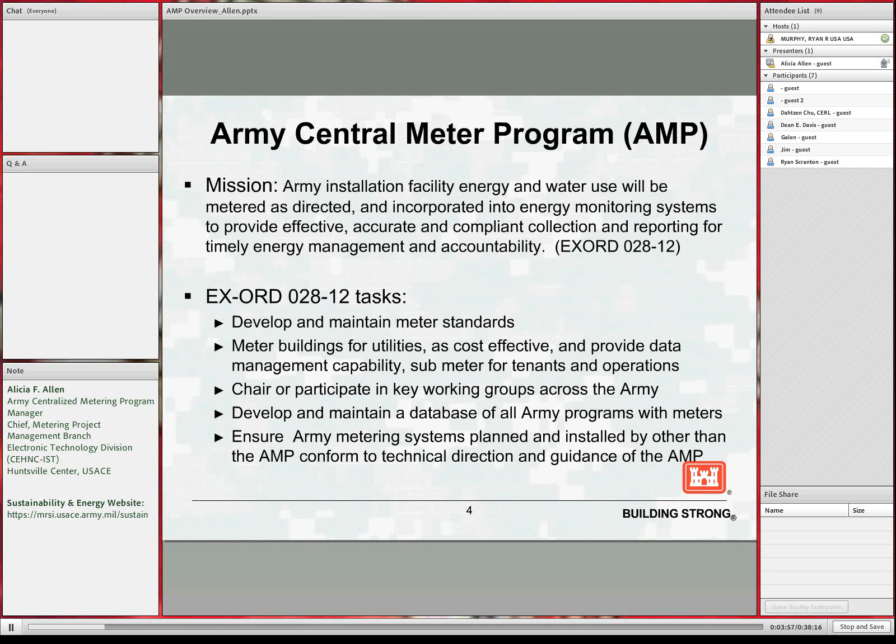The first task is to develop and maintain meter standards. The meter standard, if you haven't looked at it lately, was updated on 8 June. It's stored on the UMCS MCX website, which is connected to the Huntsville Center homepage.

We have it ready to go on AKO when AKO comes back up, and it's also on the Sustainability and Energy metering webpage, which some of you may have seen. We have an ECB in development that will also issue that guidance.

The task to meter the buildings for utilities as cost effective and provide data management capability has criteria: 29,000 square feet is a Tier 1 facility, which is Army criteria. A secondary criteria, which is really the primary criteria, is $35,000 a year in energy cost, which is DoD criteria.

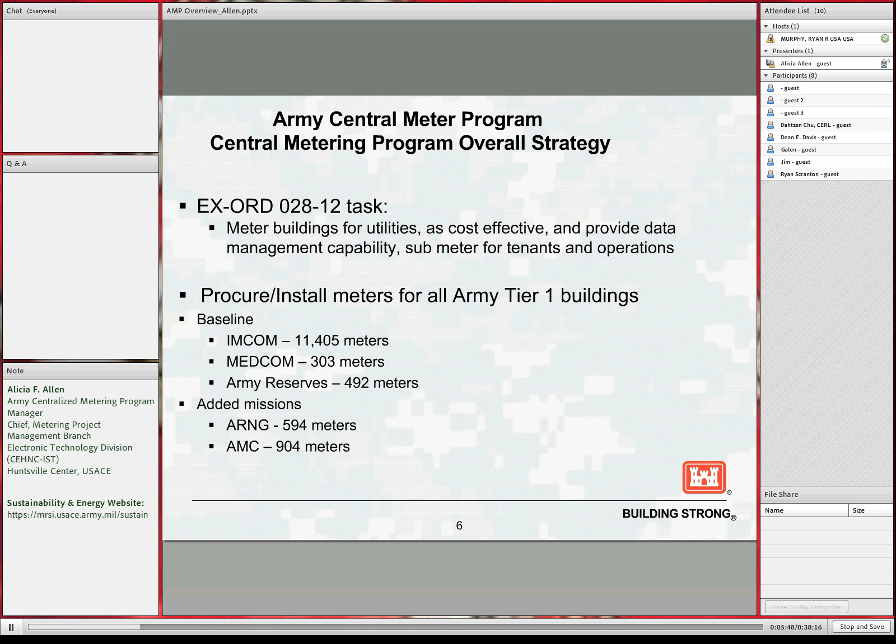The baseline for Tier 1 facilities was 12,200 electric meters, divided as shown here. The added missions for the National Guard and for AMC brought that up, as well as changed site conditions on the original locations. Now we're at about 14,500 electrical meters that will be installed for Tier 1 facilities when finished at the end of this fiscal year.

The meter system includes multiple utility meters: a gas meter, a gas pulse kit that fits on an existing meter, a water pulse kit that fits on an existing water meter, and/or an electric meter, in any combination. All of these meters feed into a building point of connection, or building level controller, sometimes called a building automation controller. These terms are interchangeable, and they represent the device that collects meter data from multiple meters.

The device feeds the data forward to the front-end server, where it's displayed, then forwarded on to an Army enterprise reporting system.

The building point of connection is an IA, an information assurance device. It has information assurance functionality, as does the advanced electrical meters we use. Because of that, they have to be tested for IA security, as well as the configuration of the front-end server. This is why we have to have an accredited system, to make sure all of these are safe from an information assurance standpoint, to report forward to the Army backbone, where the MDMS, the Meter Data Management System, resides.

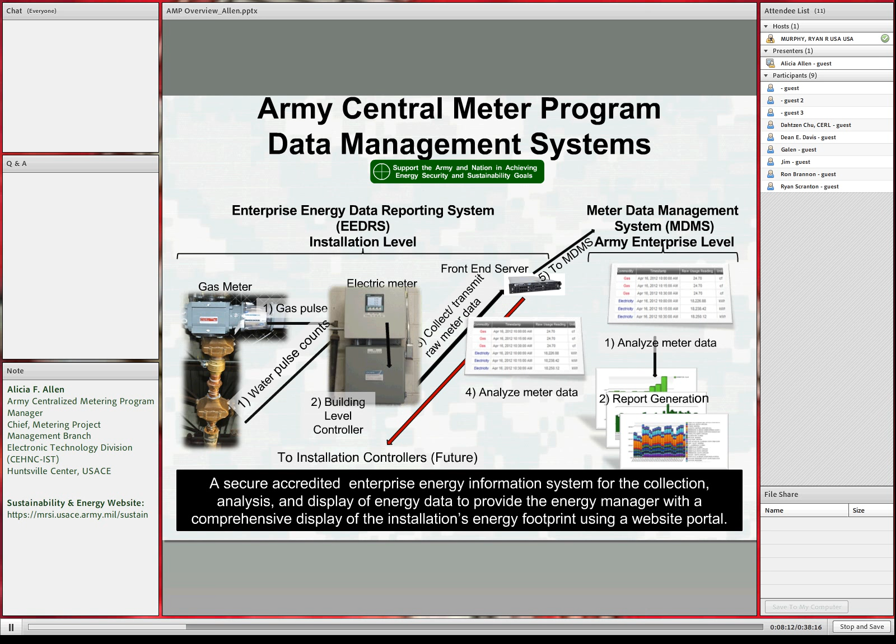Depending on the server system installed at the installation, there will be some level of reporting. There's always some level, but the actual number and type of reports available may vary. There are standard reports available from the MDMS location. I don't have the full briefing for the MDMS as part of this presentation, but if you have any questions about it, we can definitely answer those.

The architecture of the metering system is shown here. The metering system's acronym is EEDRS, which stands for Enterprise Energy Data Reporting System, not to be confused with the enterprise level meter data management system. We're kind of going away from the use of that terminology at times.

Basically, your architecture includes any of your metering devices, a building point of connection, various switches that send the information back along the net backbone at an installation to a head-end server. We do have a few situations where wireless along the net backbone is approved. Right now, the Army meter system is on an isolated VLAN for the metering system, I think it's VLAN 124. Even though the NEC is responsible, it's actually an isolated system, not tied directly into the installation's network.

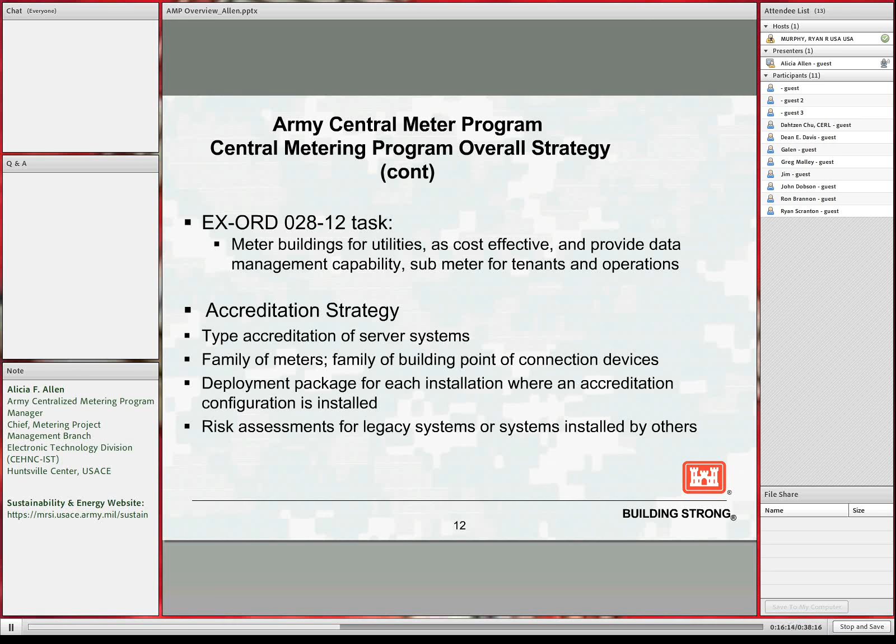As I said, we have 6 systems. The goal is to have all the systems be open systems, which means they can talk to anything, and they're very easy to work with and make changes to. Right now, only 2 of those are open systems. Our plan is to get the ATOs on the systems as they are approved, but eventually seek accreditation of non-proprietary variations for the other 4.

The organization performing the information assurance testing for us, and that has prepared the common documentation, is ISEC.

We have weekly phone calls with ISEC, NetCom, ACSIM, and supporting organizations at the programmatic level to make sure we are moving as quickly as possible on processing the IATOs, the cons, and any other issues, and that when the ATO documentation is submitted, that also moves as quickly as possible.

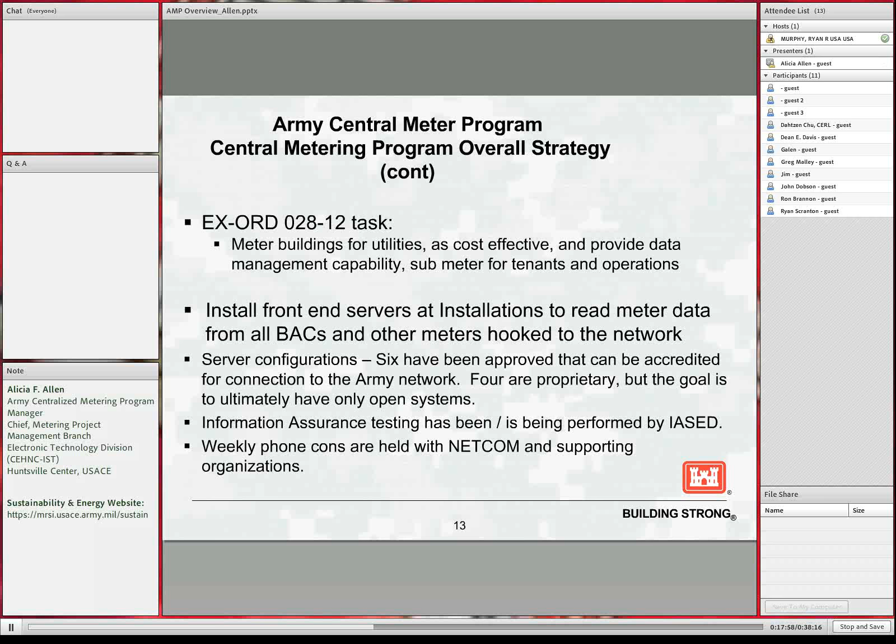We'll also be reinitiating our weekly fielding calls that some of you may have participated in when we were getting ready to install some of our INET servers. Those were suspended for a few weeks because of a complication with the cons, but we're now ready to go back on board with those.

The schedule for the connectivity, here I've shown the IATO. We have IATOs, interim authorities to operate, for 4 systems. The 5th system is at IACORA to start the process for the IATO. The 6th system, we've had difficulty getting the correct documentation from the contractor, and at this point we're likely to just go for an ATO.

The ATO accreditation process takes about 7 weeks at the ISEC level for the certifier to review all the documentation, verify the system does what it's supposed to do, and define what the risks are. That accreditation process will start the week of December 2nd for configuration number 1, and every 7 weeks after that we'll start the accreditation process for the ATOs of the other systems.

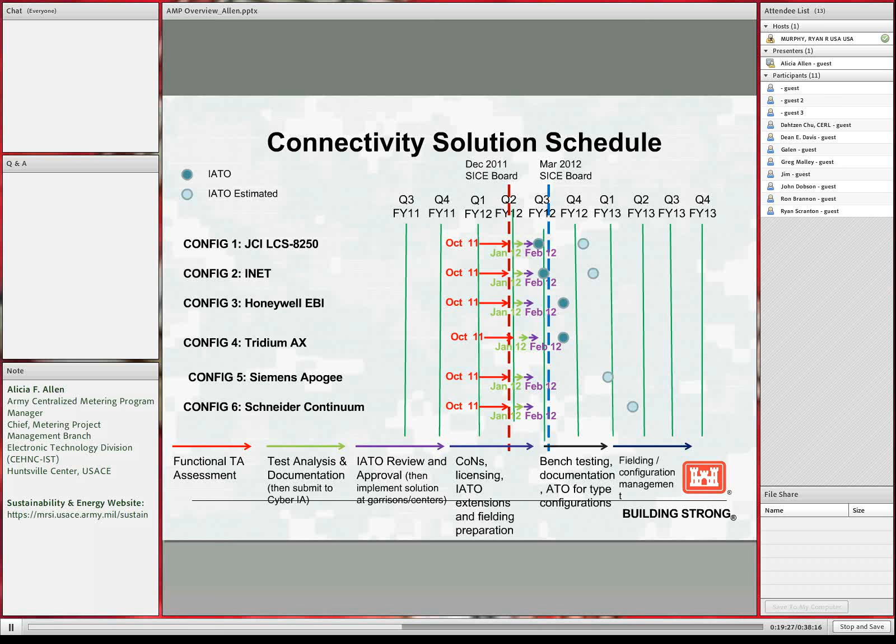As I mentioned earlier, the ultimate goal from an Army standpoint for reporting is to have the information available at an enterprise level system. That system has multiple methods of displaying and storing data, for historical use as well as for current situations.

The MDMS system is managed by John Trudell. Some of you may be familiar with him, as he, early in the process, helped support our IA process for the metering.

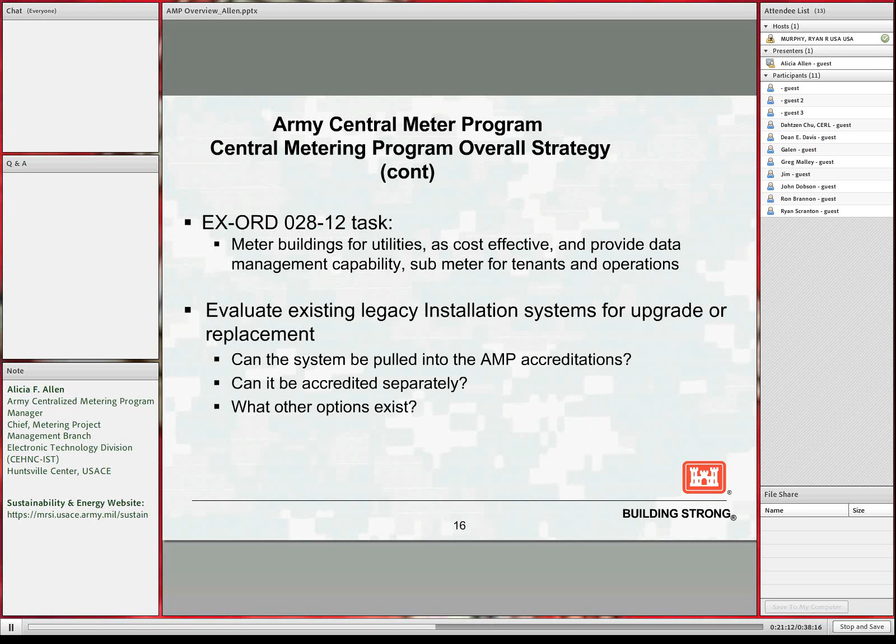I've already talked about evaluating the legacy systems for upgrade or replacement and some of the questions that will be faced. By the way, on these legacy systems, we'll have at least 2 courses of action to replace components or even servers: one could be to get in the queue for Army funding for most systems, or it might be to go ahead and make those changes with customer funding from the installation or from a tenant in some cases, which might allow them to talk to MDMS faster.

We expect to be finished with the Tier 1 electrical metering by the end of FY13. We are starting up the Tier 2 buildings this FY, and those are the lower priority buildings, the smaller buildings, the less energy-use buildings. There is criteria developed for how we select those facilities, and it is in the implementation plan for the Army meter program.

That criteria is under review by ACSIM, and it may be modified before we end up with a final list of what will be a Tier 2 building. In addition to the lower priority buildings, the Tier 2 process will include a lot of submetering for tenants, such as data centers and simulators, and we may also go back and look at facilities that were not heavy users when we started the program but have since grown larger. So we'll go back and look at the original list of buildings as well.

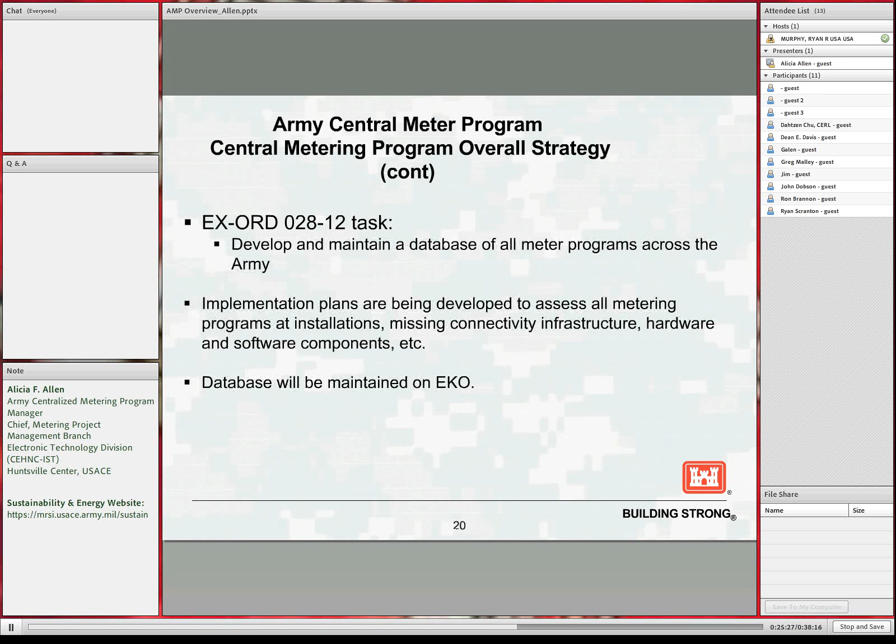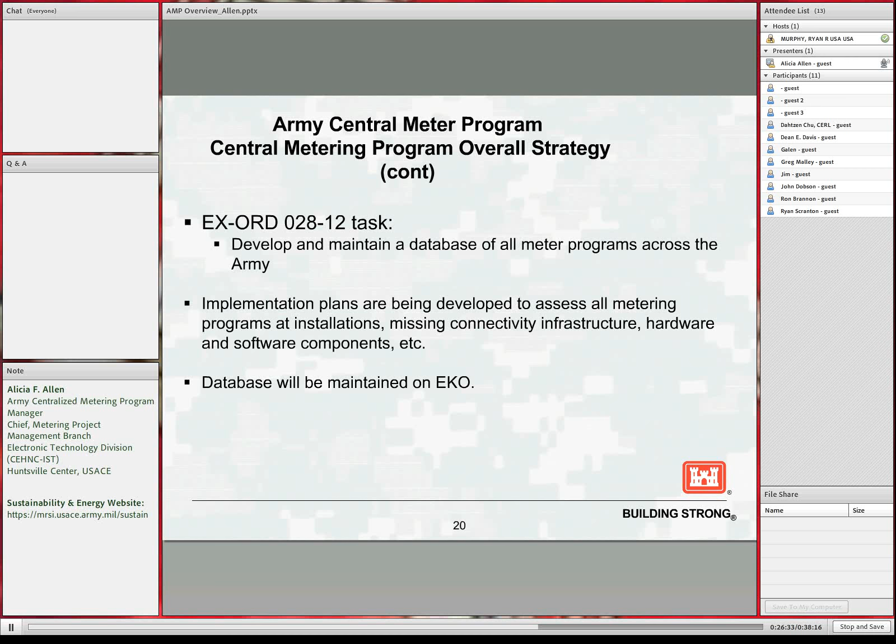What we are working on to pull everything together is the implementation plan. A big part of that will be the deployment package for the metering system servers, but we envision having an annex for each meter system at an installation. It'll include information about buildings that are part of the installation network, those connected and those not, and it will include cost estimates and a path forward for how we might get those buildings connected—either through wireless application or installing fiber optics, or simply choosing not to connect that building at this time. The database of all meter systems will be maintained on EKO when it comes back up.

Part of our responsibility is to make sure that any metering system put in by others for Army installations and Army projects conforms to the technical direction of the Army metering program. All meters installed should be one of the types that meet the meter spec, and for the fastest connectivity to the Army network, one that has been tested by ISEC or others, such as something on the Army approved products list. If it is not a tested component and has I/O functionality, it will have to be tested before it can be brought into the configuration of the ATO.

I mentioned the op order that is to be issued, and this will significantly impact MILCON projects through the districts, as some of the other systems included would be ESPC, privatized utilities, and any number of systems that do metering. Eventually it is to include any type of renewable projects where energy is created and put back into the installation to offset the energy use of the installation. Anything metered is supposed to conform to the requirements approved for metering for the Army, so they can tie into the Army network.

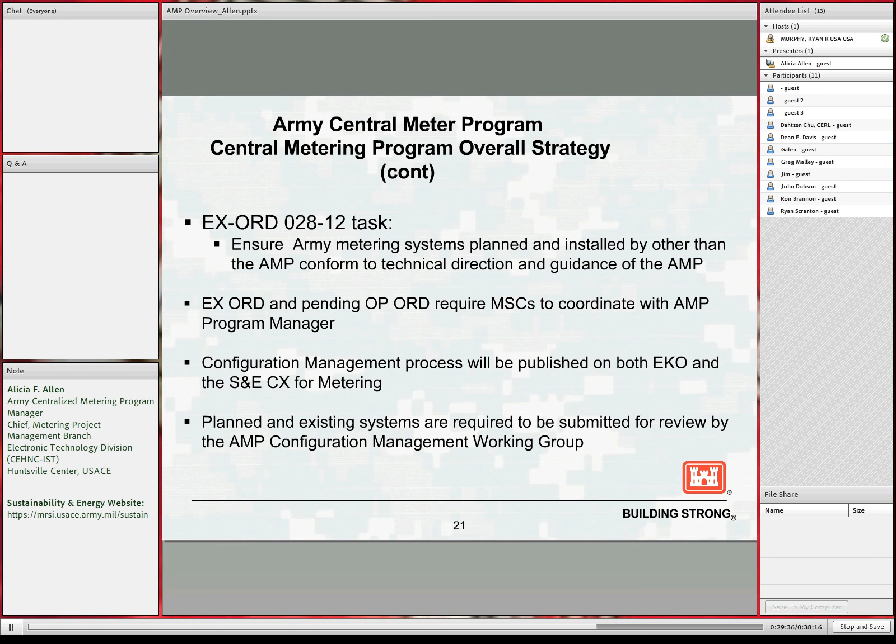When a new system is planned, including a MILCON complex for example, those systems are required to be submitted for review by the AMP Configuration Management Working Group, which is the Army Central Meter Program Work Group here in Huntsville that I mentioned earlier, and will need to be approved by the CCB, the metering CCB.

Additional to the XORD responsibilities that the Army Central Meter Program has, we are established as a sustainability and energy center of expertise. As such, we're responsible for making sure you have the information you need to effectively execute any metering-related system or application.

As such, we have identified some webinars like the one we're doing now, which we will give over the next few months and the next year or two. MDMS does have their own series of webinars they've been doing, and they may do their own. We also publish guidance—I know there's been concern about smart meters, and there was an article we published in the Public Works Digest that just came out explaining how the Army is doing metering and why the smart meter concern is not an impact for Army systems.

Where are we on the program?

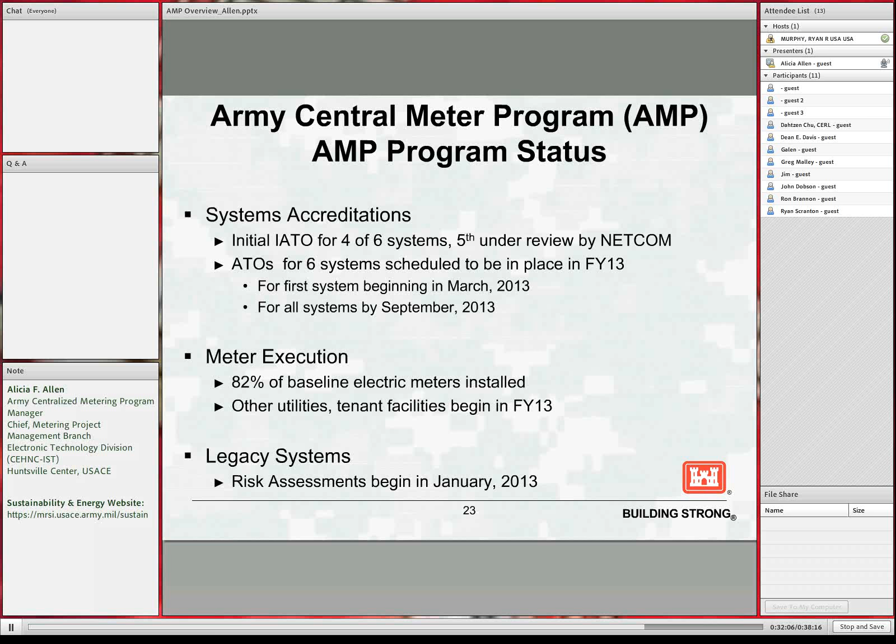Meter execution: 82% of the baseline electric meters are installed, and very few of the other utilities are installed on Army installations per the guidance we've had to date. Other utilities and tenant facilities are beginning this FY. And to recap, legacy systems risk assessments begin in January.

From a programmatic standpoint, the site plans are going to be a big key for us this year, and we're going to need help from each installation and those connected to them, to make sure we accurately capture what systems are there, what systems are planned, and how these systems will be maintained over their life cycle.

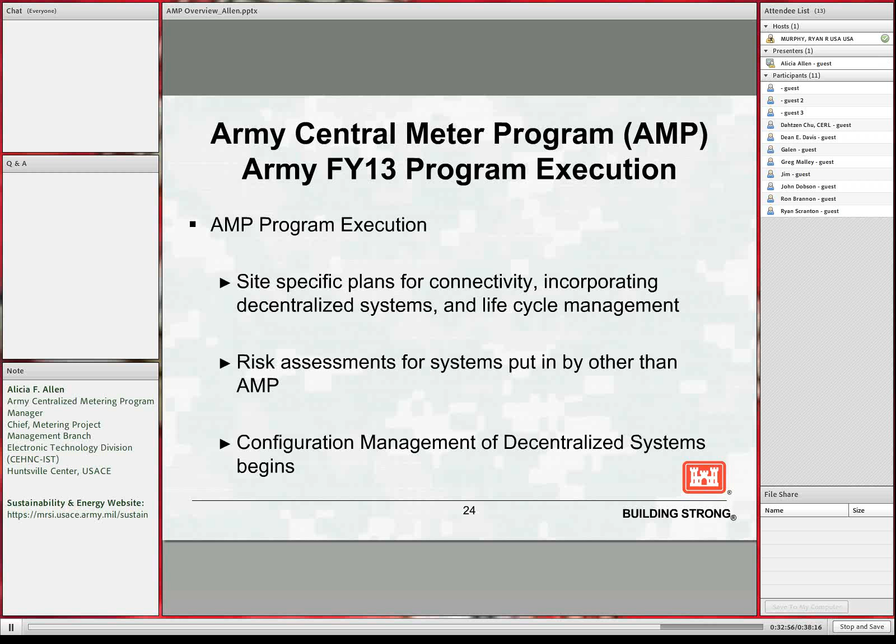The risk assessments are going to be a big priority from a programmatic level this year, and then configuration management, to bring as many components and as many systems under the ATOs as possible.

The training I've already talked about. It is also a requirement in the XORD that we do expert training and support the Army community with metering information, so we look forward to hearing from you with any of your questions.

Additionally, we do metering for other customers who would like to get a head start on their metering, or need a little help, in addition to the Army installations.

Based on the POM for this year, this is what we expect to get under contract. We still have quite a few meters left to do, both from sub-metering of facilities and operations, as well as the OCONUS meters going in this fiscal year. And we'll start on the other utility meters.

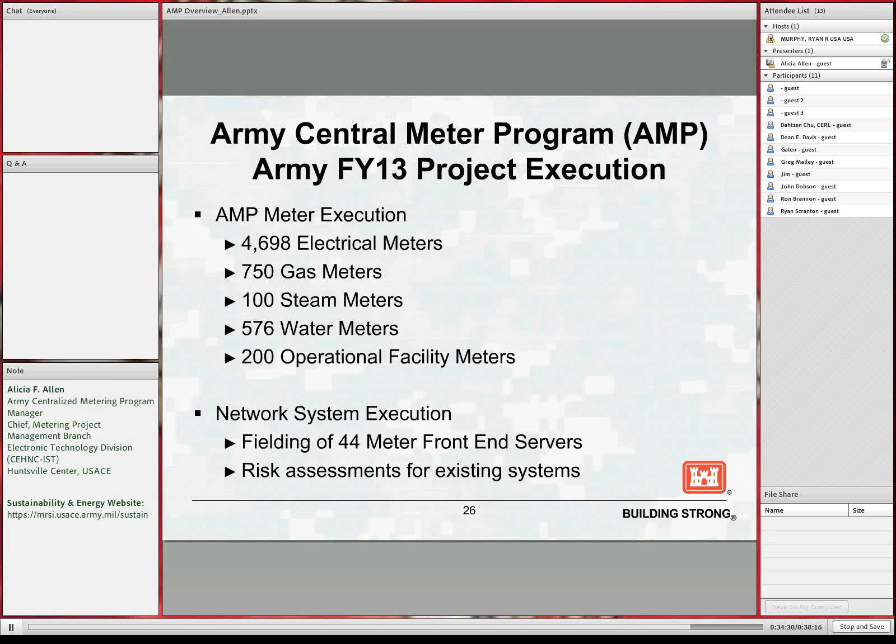We will also start — and I have a couple of slides on operational type facilities that we have pilots on right now — getting those computer systems installed and reporting to MDMS on a much larger scale.

One of the pilots we have going on is for metering simulators. The reason it's a pilot is the Army wants to truly understand the energy usage, and whether or not it is feasible and cost-effective to separate out that energy usage Army-wide.

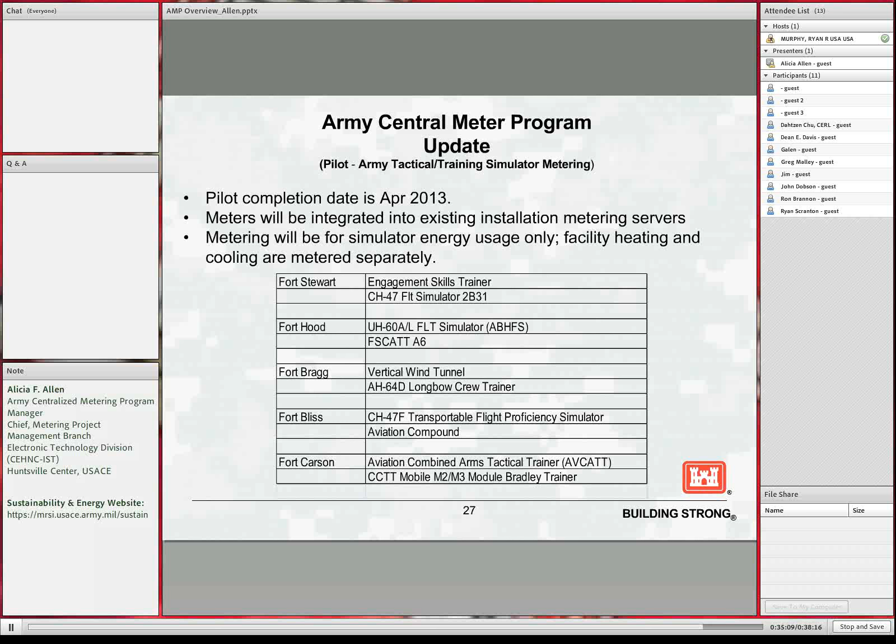We expect to complete the pilot in April, and there is a list of the simulators identified to be metered under the pilot.

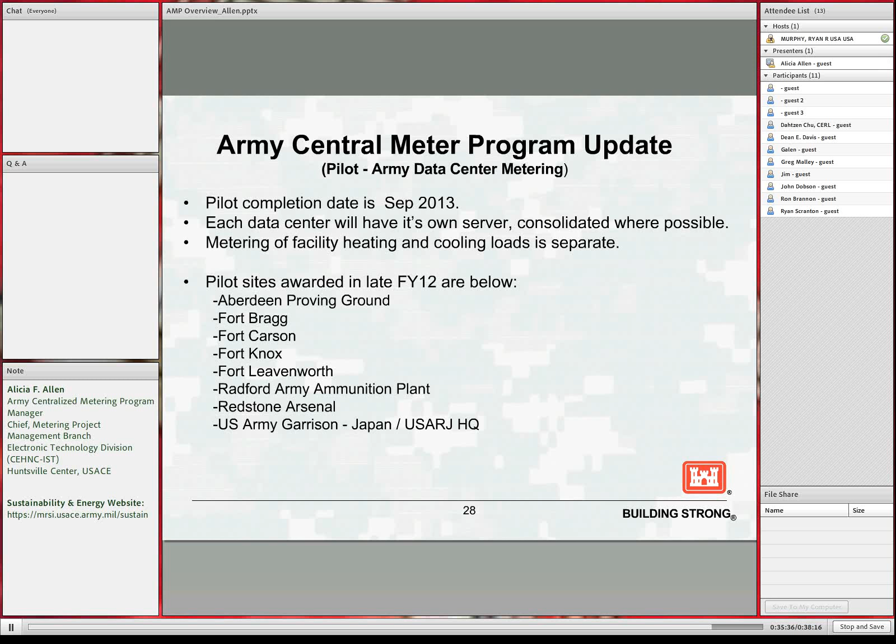That is the metering program overview in a nutshell. So now the question is, how can we help?